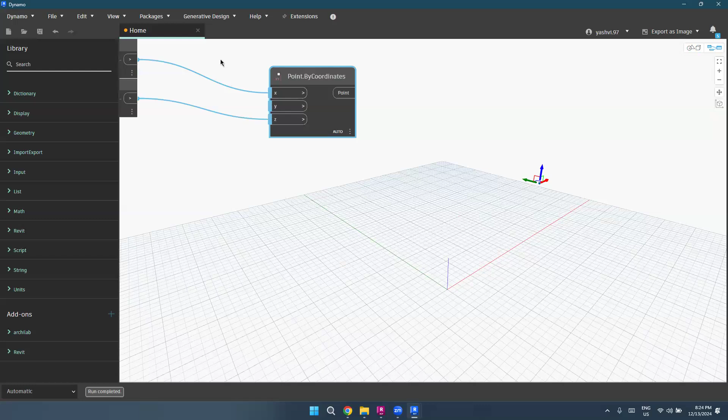Now, since I moved this particular point as per my requirement, I have automatically generated a couple of other nodes on this side, which define the position of that point. So if I go back to my graph view and I change this, you can see that the number changes over here as well.

If I move the green point along the green axis, I have another node that is generated for me - so I have X, Y, and Z. If I take this point and move it anywhere, these numbers automatically change.

Okay, if I try to bring it down to 0, which would be difficult because it doesn't snap, my numbers keep changing as per whatever my position is. Now if I take any of these and delete it, let's say I delete the Z1, that changes my point position again. It reverts back to 0, 0, 0 - brought back to the origin.

So that's the difference between your graph view and your 3D preview. Now let's understand what these nodes are, what they do, and how we work with them. We have different categories available according to the kind of node we want to work with, like some geometry nodes.

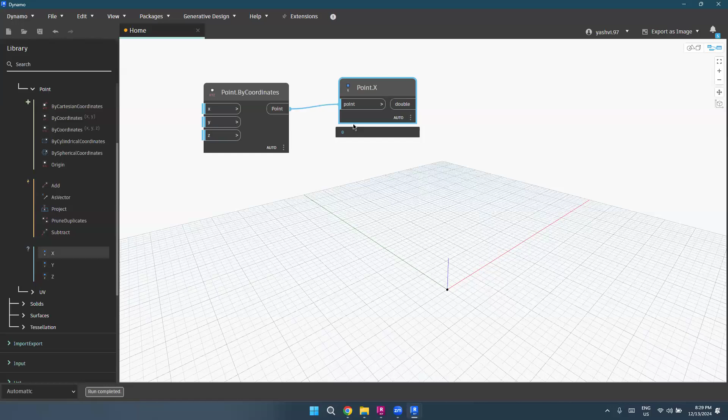So I wanted the x coordinate, so I used the x query. It's telling me that my x coordinate is 0. If I change it here, now it tells me that my x coordinate is 22.7. So it's just a way for you to generate data or get information from something that already exists. Right now I did it for a Dynamo element.

You can do it for Revit elements as well. If I just want to get the height of a level, or if I have a family and I want specific parameter information, I can do that using these queries. So those are the three different kinds of nodes that we have - the create nodes, the action nodes, and the question or query nodes.

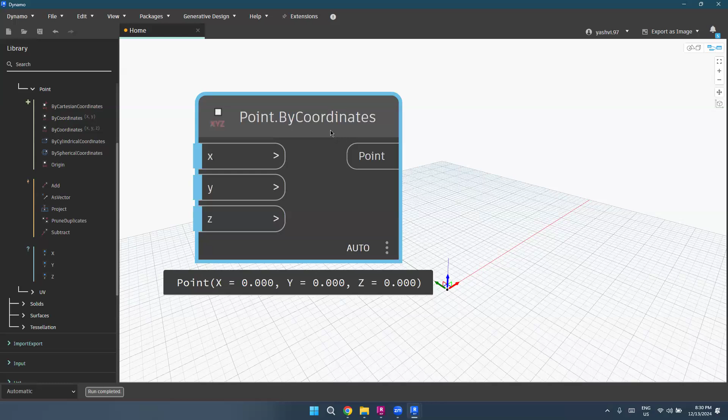Now for every node, the node has a particular anatomy of its own. At the top, you will have information or the action or output that the node gives you. Here it tells me that it is going to give me a point by coordinates. If I hover, it will tell me that it generates a point for me on the basis of the 3 Cartesian coordinates. We also have a point by coordinates in just the x and y axis. So at the top, you have what the node does and how it does it.

On the left, you have inputs. So I have my X, Y, and Z inputs because this particular node requires 3 inputs - it needs an X coordinate, a Y coordinate, and a Z coordinate. If you don't have anything attached on the left, it will revert to a default value. So for this particular node, the default value for X, Y, and Z is 0.

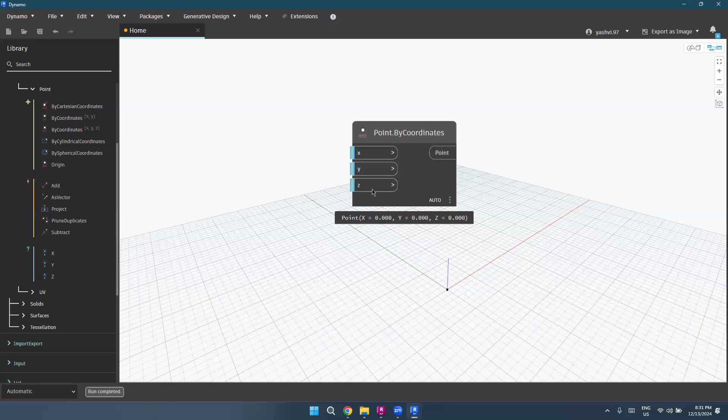Okay, on the right you have the output. What is this particular node going to give you if you have the proper inputs? So it tells me that it's going to give me a point. At the bottom, you're going to have data related to that node. Here it tells me my point is at X, Y, Z at 0, 0, 0.

So that's the basic anatomy of a node. At any point, if I'm adding a lot of nodes or I want to rename this to something custom that's performing a specific action for me, like this is my origin or starting point that I'm generating, I can just double click on the name and rename it. In that case, you get this blue icon on the side, which says you have renamed it from something else.

Are you guys following me so far? What are the different kinds of nodes? What does an individual node look like?

Okay, perfect. So one way to add your nodes is through your library. I can just go to the specific section, click on it, and it'll get added to my screen. Another way is you can search for a specific node here at the top.

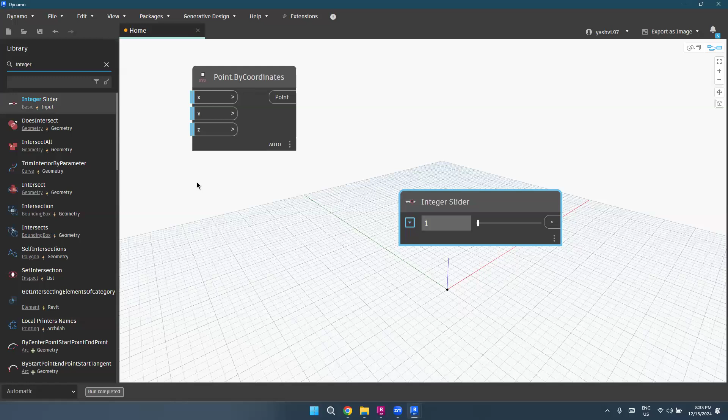The third way to add your nodes is you can right click on your screen. Usually the way I work, or people who've been working with Dynamo for a while work, is in order to make maximum use of their space, they usually have the library collapsed. I can just right click, search for the node I want, and have it here on my screen.

So let's say I want a number - I have a number slider as well that I can include. Now what is the difference between an integer slider and a number slider? An integer slider would always give you integers, which means it won't give you decimal points. It could be positive or negative, but no decimal points. Number sliders will give you decimal points.

I can change my integer slider to whatever I want - whatever is my minimum value, let's say -10, and my maximum value, +10. Now if I move my slider, the value ranges from -10 to 10. If I don't want a step of 1 - step is the interval between two consecutive numbers - I can change that step as well. Maybe I want it at 5, so now if I move my slider, it would only snap to -10, -5, 0, 5, and 10.

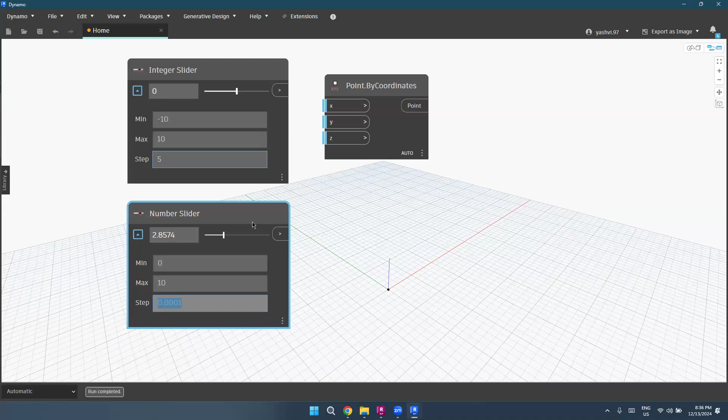So what I'm going to do is delete this number slider for now. So I have this integer slider which ranges from -10 to 10 at an increment of 1. Now here you will see I have this output - there's no input required for this integer slider. If I collapse this, you'll see there's no input area, only an output area.

So I can take this output and connect it with my X coordinate. Here you will see that on my x-axis, it has moved along the number that I've specified, which is -10. Okay, let me just zoom in slightly.

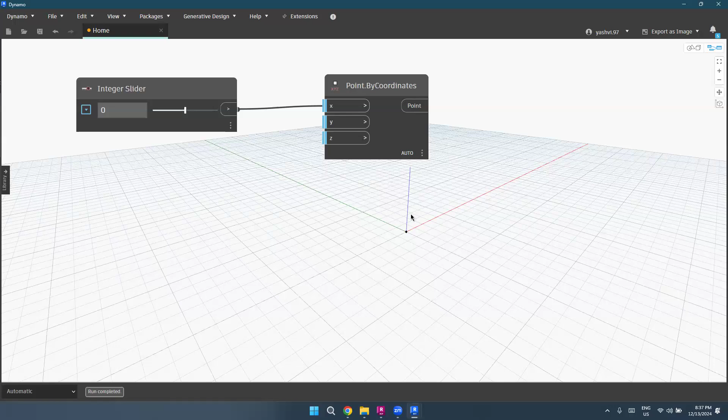Okay, so it is at -10 right now. If I change the number slider, like if I change the slider from here, you can see the point move on the screen. Now, the reason why this is happening or why it's working automatically is because we have set our script to automatic.

At the bottom of your interface, you're going to see automatic written, and next to it, you will see run completed. What this means is whatever changes you do in your script or on your interface right now, it will get executed immediately. Your output will keep on updating as you keep changing your input.

Usually we only keep automatic for smaller scripts, where we're not doing a ton of work, we're not working with a lot of geometry. Only in those cases do we work with automatic, because the issue with Dynamo is that if it crashes, it will crash Revit with it.

Dynamo will never crash by itself, but it will make your Revit not responding. So if you've not saved your work, Revit would also crash. So generally, a standard practice is before running Dynamo, always save your projects.

Once you are running Dynamo, instead of automatic, you can keep your runtime to manual. When you do that, it will never run your script by itself. So even if I change my slider, it's not changing the position of my point because I have not run the script yet. The moment I click on run, now my point would change. If I bring it back again, no changes happen until I click run.

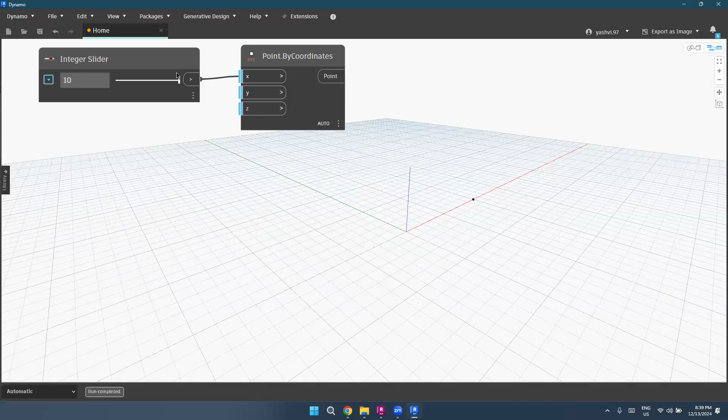For now, let me just keep it to automatic so there's no changes happening. So we have the integer slider, connected to X. Now, every output can be linked to multiple inputs. It's not necessary that the integer slider I have can only be connected to X. I can take the same and connect it to Y, and connect it to Z also.

But every input can only have one link. I can't have another integer slider and then connect it to X and have both of them linked. That is not how it works. X can only have one value. Either it is this node or it is this node. I can't control or change it to multiple nodes, but this particular node I can just connect it to different nodes.

So let's say I have this integer slider at 0. I'm going to generate another point, so let me just control C, control V, and this one is going to be at 10. So this is what it looks like right now: I have one point over here, another point over there. Now you will see that the output for both of them is point. So we have point 1, point 2.

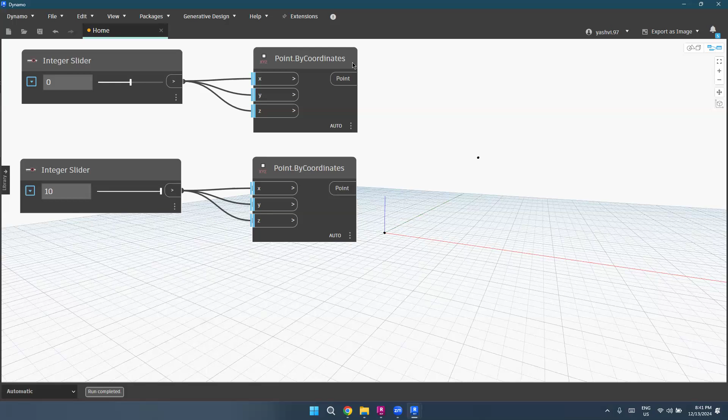Now, let's say I'm very new to Dynamo. I don't know what to do further. What can I do with 2 point inputs? So in case you have any confusion like that, where you're not sure what is the next step, if you double click on any of your outputs or inputs, it's going to give you different options, showing what are some of the outputs where I can use this particular point.

So one option is I can make a list. Other option is I can create a line if I have 2 inputs. You'll see a confidence rating on the left as well, which is how confident Dynamo is with this particular result.

Let's say I select this one, by start point, end point. So I have the first output, which is the start point. Then I can also connect the second one. When it's not connected, I don't have a line - it reads in red that I don't have an option or it's not connected. Once I connect this point, I now have a line.

Here you can see it says the line start point is XYZ0 and the end point is XYZ10. You also get the direction in vector format, and then at the last, you get the length.

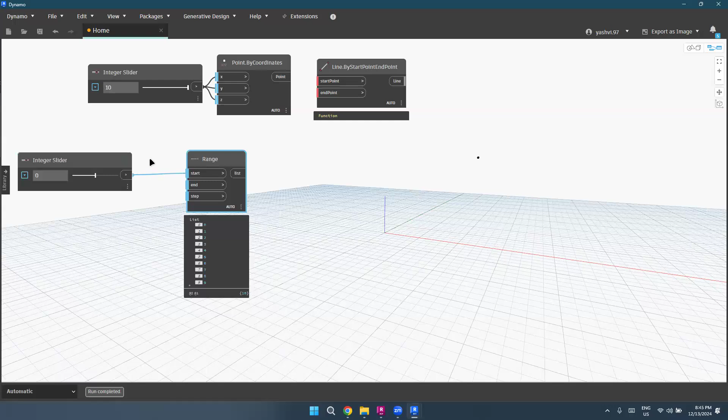So what I can do is let me just get rid of some of these. I can say that this is my start point, I'll make a copy of this. My endpoint can be 10, this can be -10, and my step I'll keep as 1 - the default value says 1, so let me just keep it at that.

Now once I have this list, I can again just say point by coordinates, and I can connect this list. So you will see here I have 21 outputs that I'm generating. I can take this list, connect it to X, so you will now see multiple points all on the x-axis at different intervals - I have 21 points all on the x-axis at different intervals.

And again, I can connect it to my line. So here now you can see all these individual points are connected to that one endpoint by lines.

Similarly, if let's say I change this to X, Y, and Z - Z will not work because it's just giving me one line. So I have something like this. I can do the same thing for this one also - I can take my list and connect it to Z.

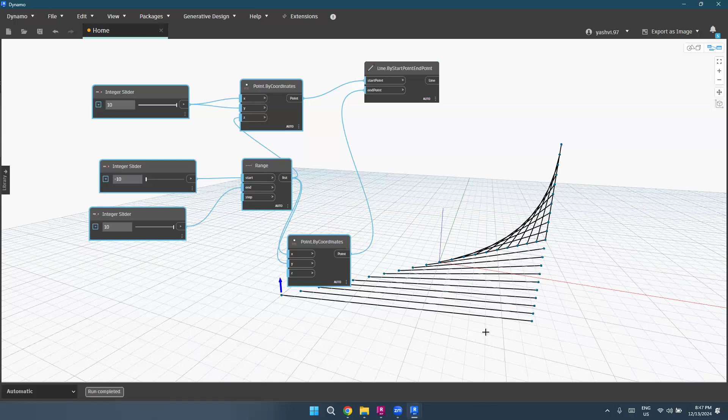So now I get something like this, where this point also has multiple outputs, and this point also has multiple outputs, and all of them are now connected to each other. If I just see this, you will see 21 lines that are generated, and you can see how they are connected - which point is connected to which other point, what is the position, what is the length, you can see all of that. Are you guys following me so far?

Now, other than this, I don't want to do all this complicated stuff, like just to generate one mesh I had to have so many nodes. I don't want to do that.

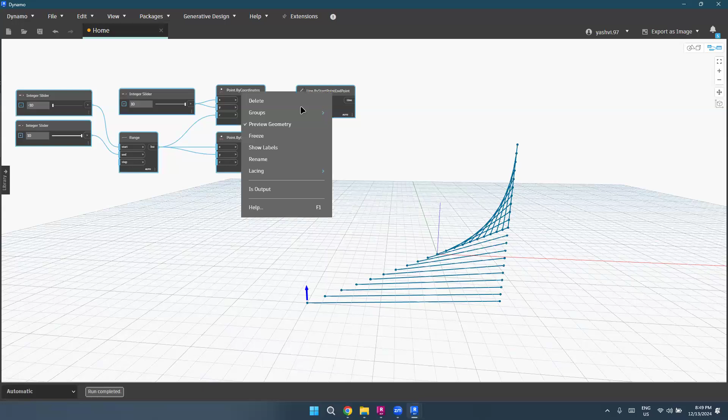When you're working with larger scripts, there's limited screen that you have, so it can be difficult to make sure everything is readable and understandable. So we can always group our nodes. I can right click and say create a group. This creates a color coded group wherein I can collapse it, and it would now show me only the input required and the output at the end of the script.

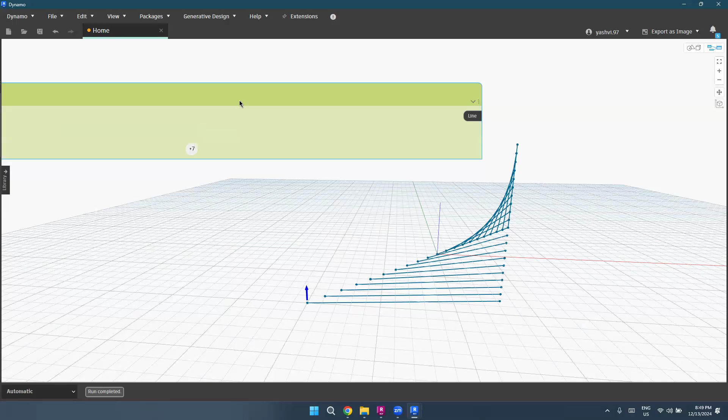So my input right now, where I've not already added something, is my step value and my Z value, and my line is the output that I get. I can change this, say this is to generate a mesh, and uncollapse it as per my convenience. This makes sure you can utilize whatever limited space you have, and the closer you place your nodes, the shorter this group is going to be.

Now what you can also do for individual nodes as well as groups is preview and unpreview geometry. What preview geometry does is, if I uncheck this, it will just hide whatever this node was.

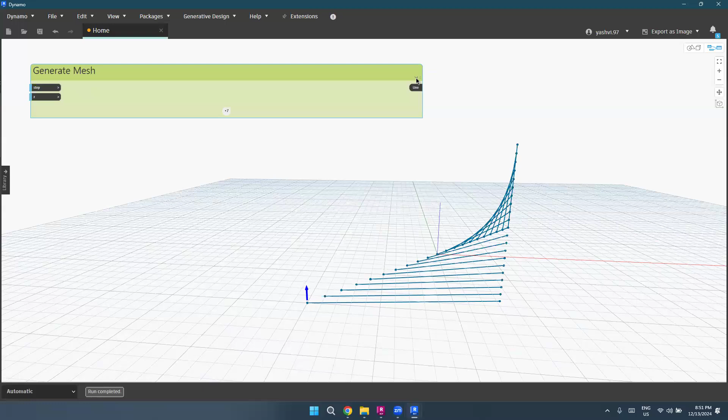What you can do is, if you uncheck preview geometry, you won't be able to see what that particular node does, it just hides the output for you. So even if I take this and I uncheck preview geometry just for lines, now it's only going to show me the points, it's not joining them by lines anymore. It would also show a gray bar at the bottom, meaning this node is right now hidden. At any point I can say preview geometry again, and now my nodes are joined back. So that's what groups do.

Now let's just hide this. Rather than doing this entire thing, we have a specific node in Dynamo known as a code block. In order to generate a code block you can either search for it, or if you double click on your screen, a code block is added. This code block also works in design script language.

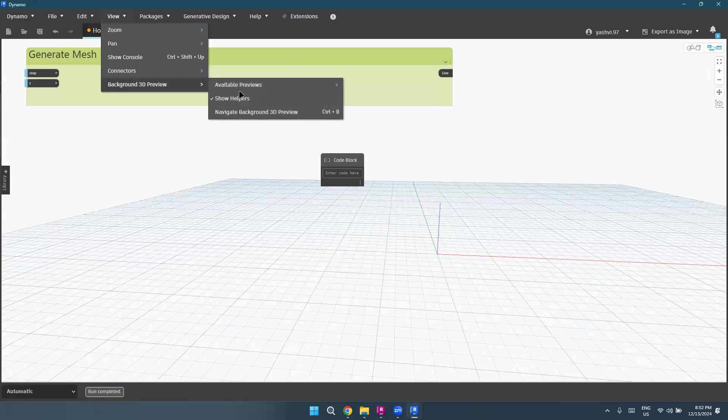So I can just say, let me just add a label to this. You can't find the label thing, but what you can do is, whatever nodes that you used, you can write them in the design script language, and it would give you the same output. So let's say I want a point.

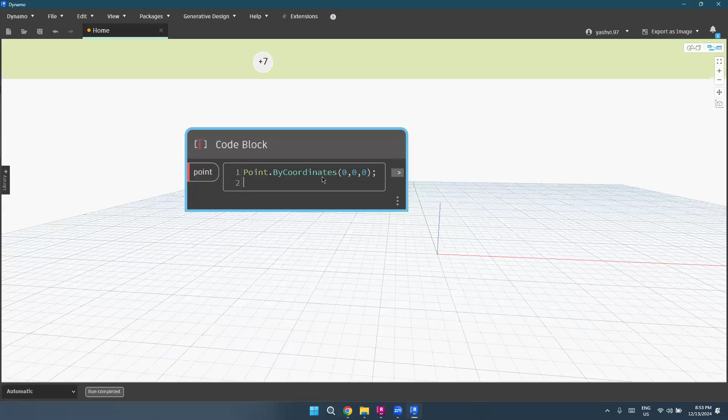Let me just zoom in so you can read it. So I want a point by coordinates, and here I can give it a value, let's say 0, comma 0, comma 0. This is my first line of code, so now I have a point which is at 0, comma 0, comma 0.

Again, I can add another point by coordinates, this can be at 10, comma 10, comma 10. Semicolon, enter. So now 2 points, one is at 0, one is at 10. Now how do I connect a line through these? Because if I want to create a line by start point and end point, I have to define what my start point and what my end point is. So how do I do that?

So for that, first I will have to give an identity to my first point. So I will say A equals point by coordinates, this would be B equals point by coordinate. And now my line by start point, end point would be A, comma, B. Semicolon, enter. So now it has joined both these with the same line.

Apart from this, what we can also do is, if I don't want to add values over here, I want to work with the range part of things. So instead of 0, I can make this a variable, that this is X.

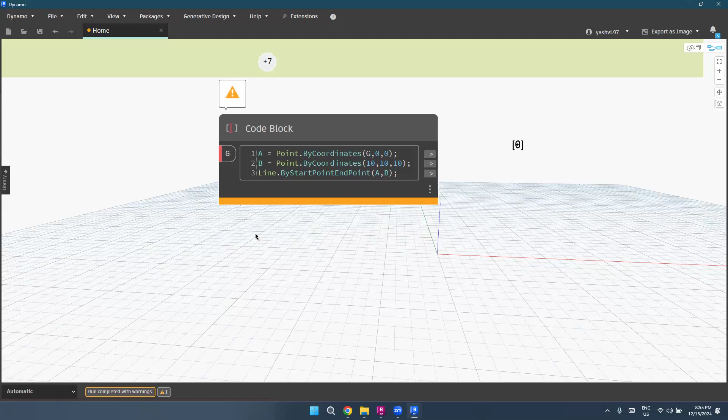Okay, so now I get an input here because I've added a variable. Whatever, however I change this variable, let's say I name it G, so now my input also becomes G. It's not necessary that this should always be X.

So I can now just add a range node. Here you can see you have 0, 1, 2, 3, 4, 5, 6, 7, 8, 9. If let's say I take point B and change the variable here as well to G, you can see how those other points are also created.

If instead of G, I name it H or some other variable, now I have another input that is added for me. So here also I can add a range node.

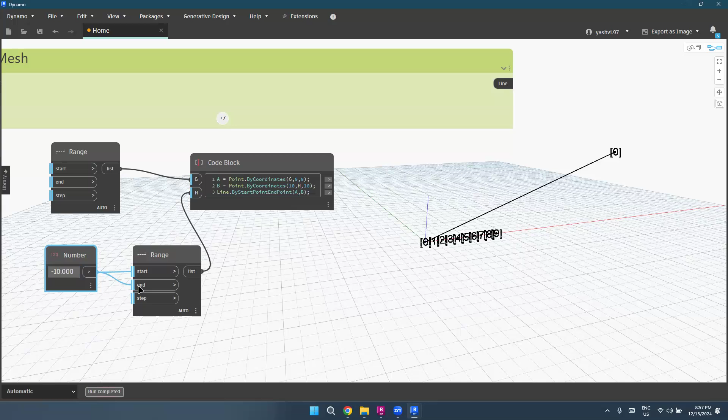Let me just search for number. And the number could be maybe -10. So accordingly, this would update for me.

So rather than having to go through this entire process, I can just write it in a code block. So here also I have that option. I can add the range part here itself, with the help of list, I think.

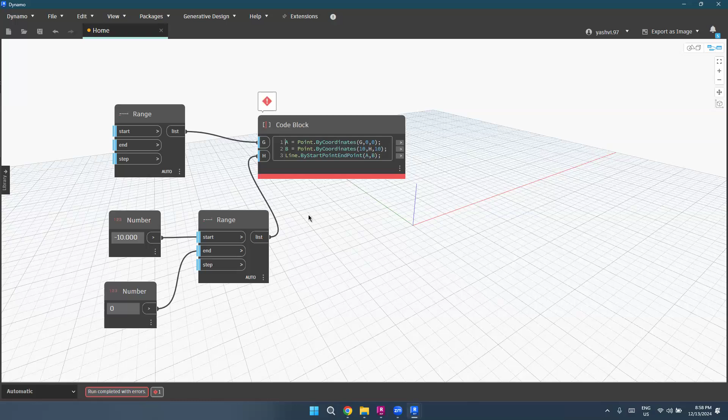Well, yes, there's some other way, but we can add the range node in the code block also. It's just a more condensed way of you being able to work with things. Because whatever I have in this part, all of that can be condensed into this one code block that I have. So it's just a way for you to keep your scripts a lot cleaner. Whenever you have easier nodes, easier things to do, you can use the code block for it.

The benefit of working with code block is that it will give you ideas. Like let's say if I want to generate a mesh, I can just type in mesh, full stop. Then what is my method of creating it? If I want to create it using points, I can mention that, and then it would also tell me what input is required. So I need point and I need indices. It'll just give me a complete breakdown of what that particular node is supposed to do.

All right, following me so far? What is the script? How does code block work?

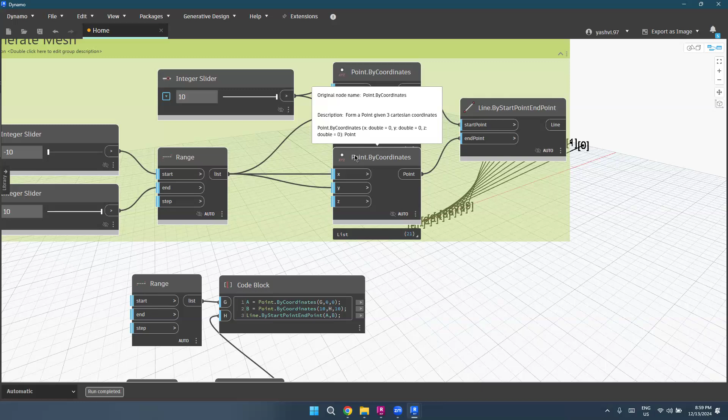These lines in the middle, these are known as the connectors. They connect your input to your output and vice versa. Okay, clear so far, everybody? Any questions so far?

Now, whatever we created so far was in Dynamo. It does not affect our Revit geometry whatsoever. How do I bring Revit into Dynamo, and how do I take Dynamo outside of like into Revit?

So for that, we need to work with these Revit elements, these Revit nodes. You will have Revit elements, you have filters, you have geometry, a lot of different things. You will have a bunch of different elements that you can bring in, a bunch of different nodes that you can bring in. So let's say I have walls.

Okay, so let me just close this for a second. Let's say I have walls here in Revit. Okay, basic wall.

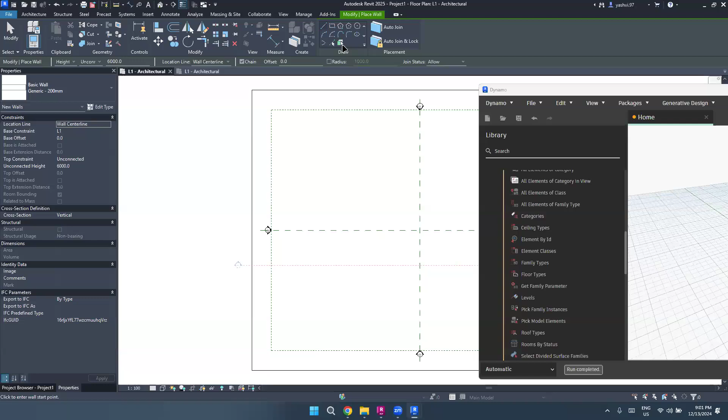Now, if I want to bring this into Dynamo, I have a bunch of different options. Either I can bring all elements that are at a specific level, I can bring in levels themselves, I can select a level from the document, I can bring in faces, so you have select face or select faces. Then you also have family instances, you have select model element, a bunch of different options.

So for now, let me select model elements. So the moment I click on that, it's going to tell me to select something in the model. All right, so I'm going to click here on select. Now you will see that Revit gets activated.

Okay, sorry, I have to use the other mode, which is select multiple. So I'll click on select. It's not open. Select multiple is not working. Let me just go with all elements.

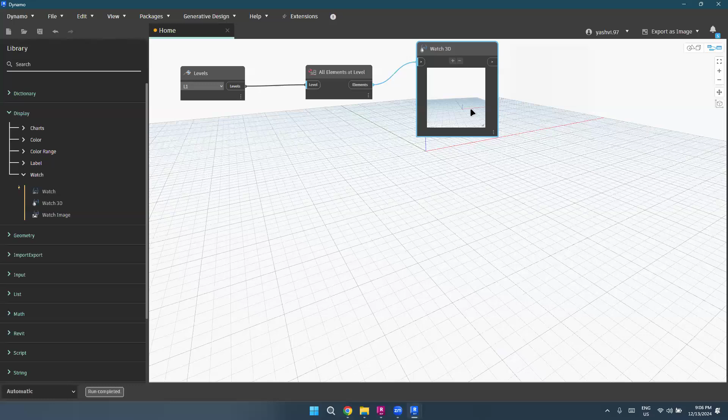Give me one second to figure this out. There's a node that I'm missing.

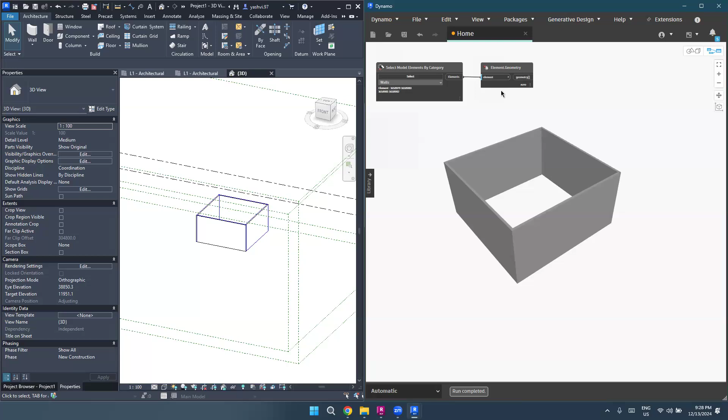Now whatever we have in Dynamo, this geometry, I can turn that into Dynamo elements also. The only difference is I will have to use geometry nodes to get individual lines, individual points, and those kinds of things. So I can generate lines.

So you can see we have a bunch of surfaces that are created. I can take any of these surfaces—if you click on any of them, you can see the location of that surface. I can take any of those surfaces or explode it further. If I just take this, Control C, Control V, now all of that is broken down further.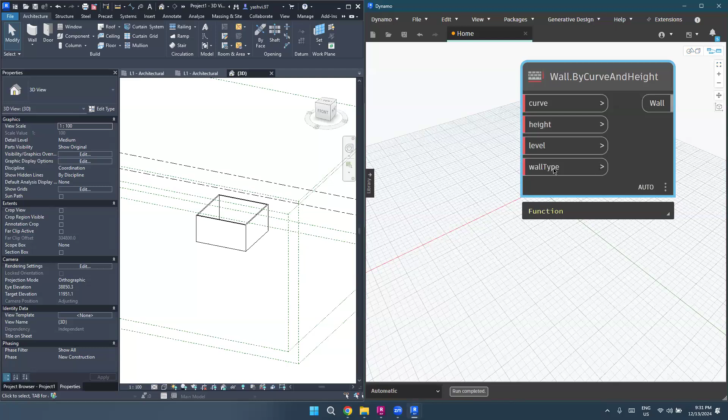First, in order to generate the curve, we can use our initial method, so I'll search for point by coordinates. Instead of a straight line, let's say we want a curve which has the best fit—best fit through points.

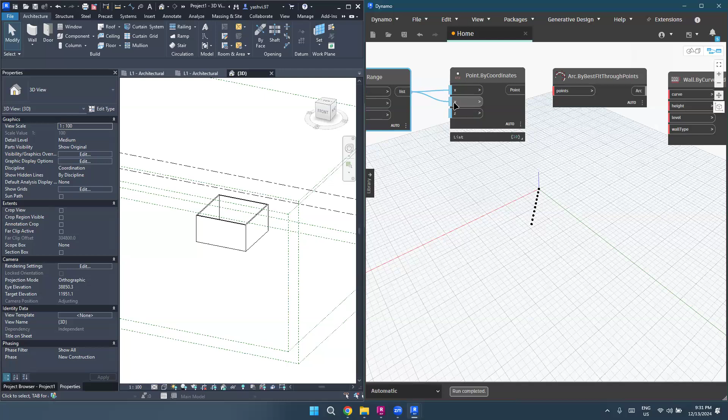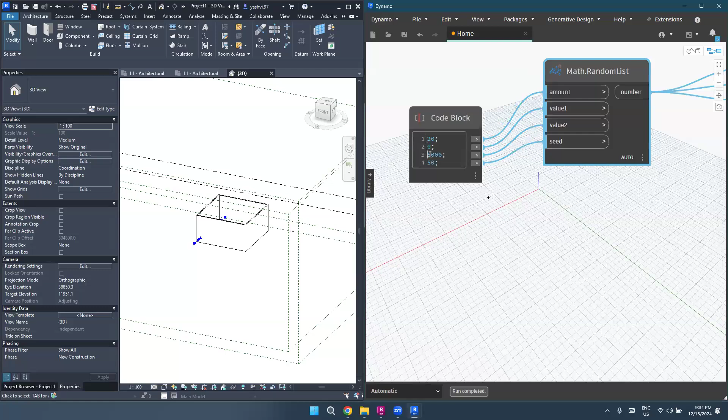And here on the left, I'll add a range, random. So here you can see in Revit also we have some random points that are now generated for us. I can turn this into something like this—let me just adjust it. So these are some points that we are getting.

Now I can take this point by coordinates and use it to generate an arc. So here you can see we have an arc, some sort of line that is created—so we have the path for our wall.

Now using this, first we can connect the arc to the curve—this can be a straight line or a proper curve, anything. Then you need to define the height, so let's say I want the height to be exactly 4,000. I'll add the height. Then what is the level?

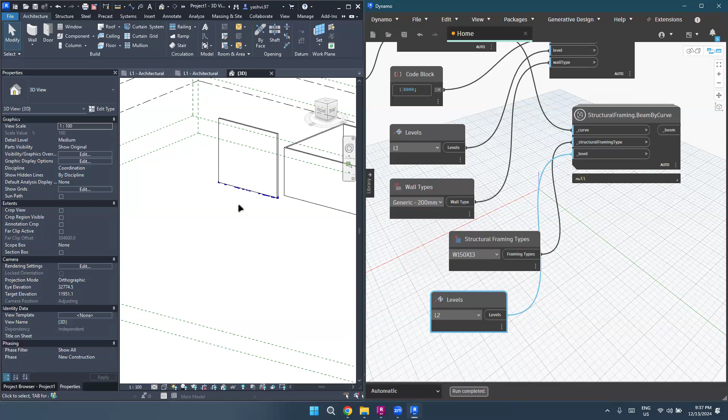And then what is the level at which you want to create it? Maybe I want a beam at L2. So in this case, then we have this wall.

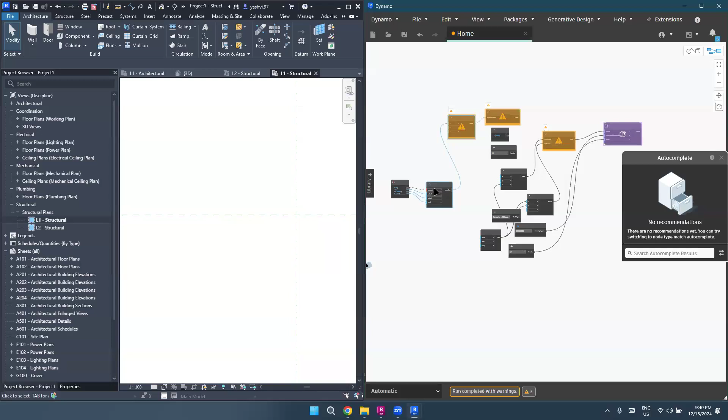Made my Dynamo file very chaotic. Just give me a second.

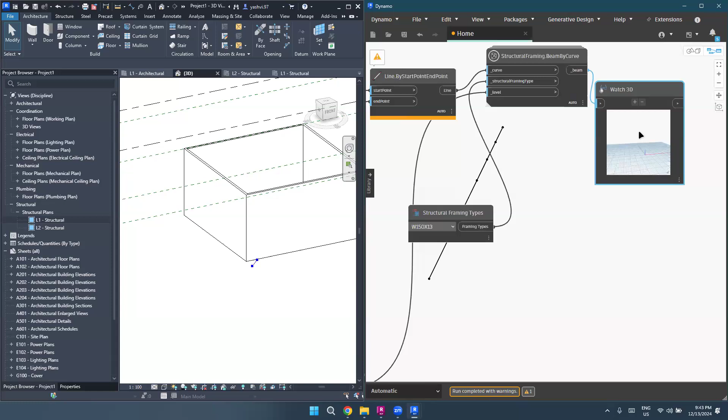So ideally, after you've done all of this, your beam should be created, generating for us. It's crashing.

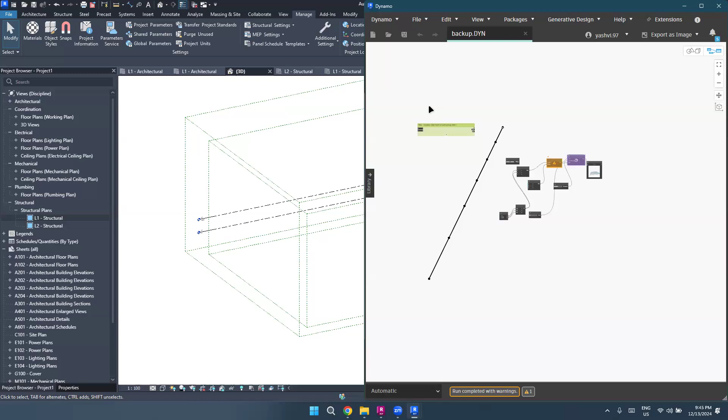So usually the way this works is, once you add the beam node, your beam is generated for you along the curve that you have selected. And as you change the position, the beam also moves. It's just a way for you to ensure that whatever you are creating, whether it's multiple trusses or multiple geometries, you can do that very easily with the help of Dynamo. That's pretty much what I was trying to explain. For some reason it's not working in my favor today, but that's pretty much what you can do.

Now, beyond what you can do with Dynamo over here, you also have Dynamo Player. With every version of Revit, you also have certain scripts that come pre-installed. These are not the sample scripts, these are specifically Dynamo Player scripts. So you have these Autodesk sample scripts, a bunch of content already available for you. This changes from version to version, so for 2025, these are the scripts currently available.

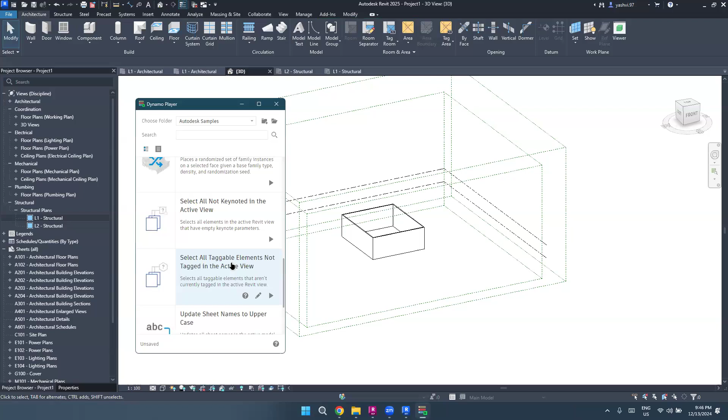So how it works is, let's say I have some walls again. We have this option, this particular script that says 'select all taggable elements not tagged in the active view' - all taggable elements not available in the current view.

I'll just come here to Dynamo Player, select 'all taggable elements', and click on play. It usually is not this slow, I'm not sure why it's not working today.

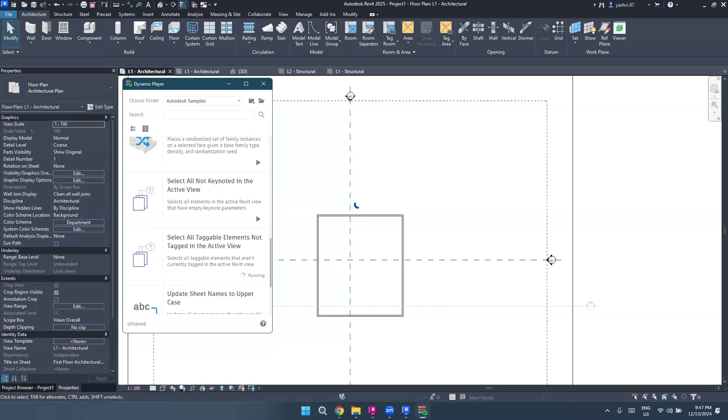What it would do is select these four walls for me because they are the ones not tagged. You have a bunch of different scripts you can run - we can also check these scripts. Here, for example, it has selected 8 things for me: some annotations, reference planes, walls, and the plan itself, because those are just things that are not tagged.

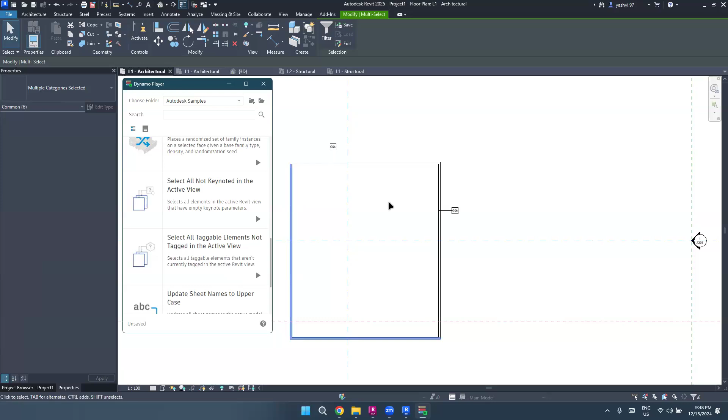If I were to tag something, like add a mark for my walls, and run the script again - now you will see these two are not selected anymore because they are tagged. It's only selecting these two walls for me.

Similarly, we have a bunch of different scripts we can work with. For example, we have this 'update sheet names to uppercase'. So whatever sheets I have over here, I can just say play - give it a minute - and you'll see all your sheet names are now in uppercase.

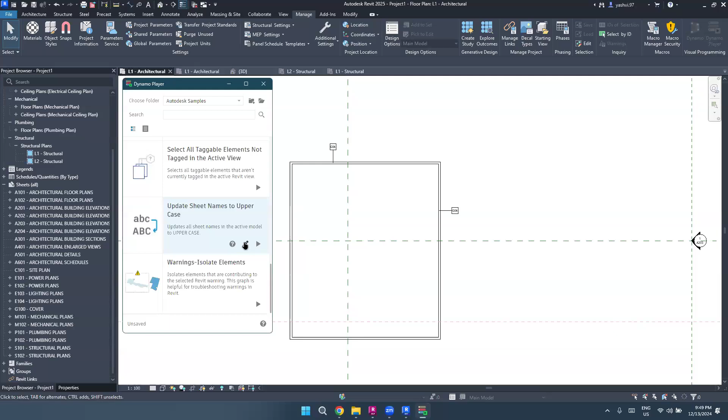What we can also do is click here on edit, edit in Dynamo. So ideally this should open up Dynamo for me, and now here you can see how the script was created.

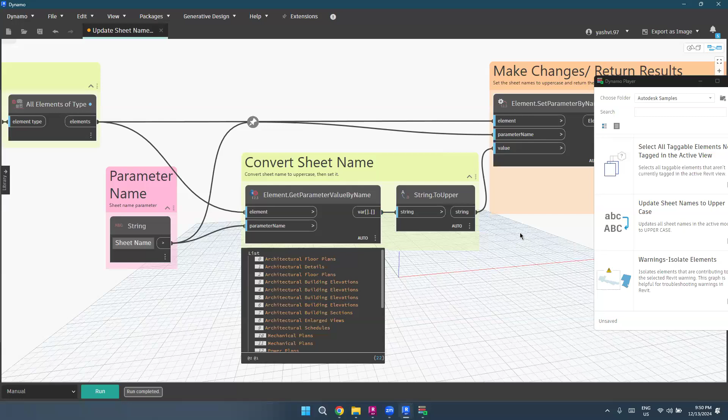First it's selecting sheets, then what is the parameter we are considering. In order to change the sheet name, we have to get the value of the particular parameter, so we need to add the element, we need to add the name of the parameter. This gives us all of the names, and then here we have this node which is string to uppercase. Similarly, you also have string to lowercase, string to title case as well. You can change the string as the value, element and parameter would remain the same, and then you have all of the sheet names converted.

Now I can change this to anything else I want. So here, for example, we want the parameter name. Let me just take this and open up a sheet. For this sheet, what are the different parameters we have? We have approved by, designed by, checked by, sheet number, all of those things. So I can take approved by as well.

So instead of sheet name, over here I'll just type in approved by. My parameter name has changed. I'll click on run again - now you will see 'approved by' is now in all caps. Similarly, we also have string.

String to uppercase, string to lowercase, we have string to title case. Instead of string to upper, I can take string to title case. Let's run it again. Now let's try string to lowercase.

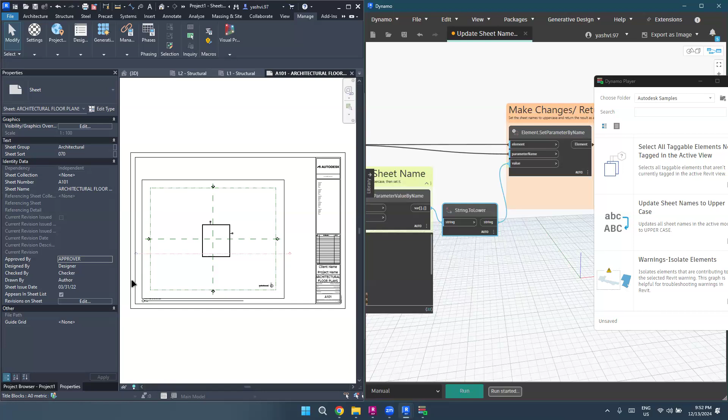Okay, so now everything is in small letters. If I go back and change this from approved by again to sheet name, and run it, all my sheet names are now in lowercase.

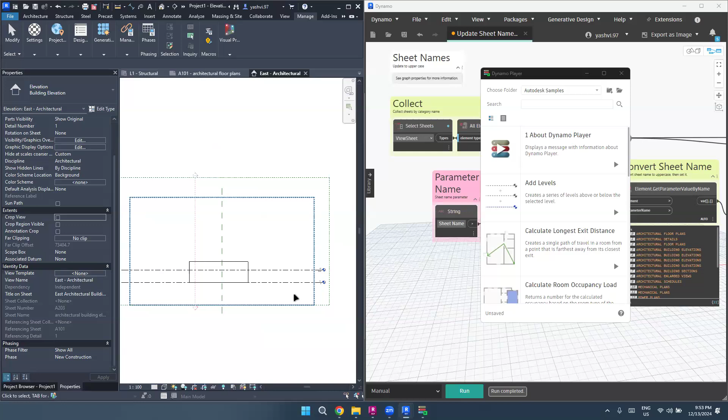Similarly, you have a bunch of other ones as well, like add levels. If I go to any elevation view, let me just enable the annotations. Okay, so we have L2. I can use this add levels, click on play.

Now, since for this script I need some inputs, I can first select the distance. I can define the number of levels and what is the level above which I need to add the new levels. My distance could be in whatever units that I want.

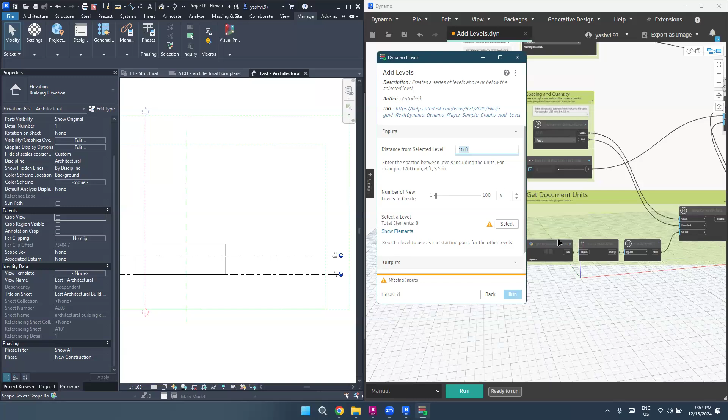It's not necessary that it's always in project units, because here we have this option of get document units. So it's taking the project units and converting it to another unit, to calculate the distance, and then it is creating the levels.

So whatever I mention over here could be, let's say, 15 feet, while my document is in millimeters. I can define the number of levels—let's say I want 12 levels. We'll click here on select, I'll select the level, and then we can click on run.

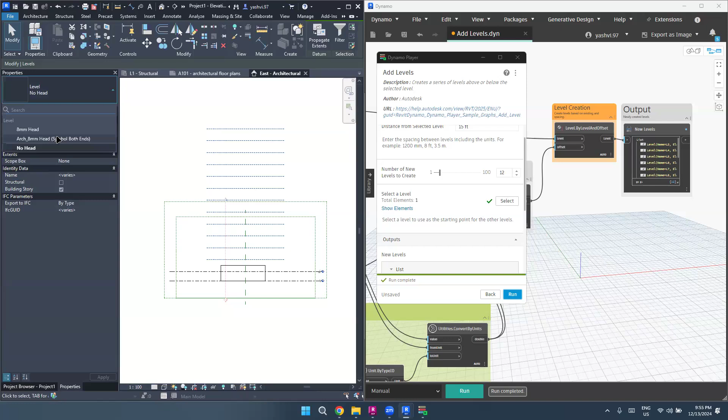Okay, so here you can now see in the middle that we have all of these different levels that are created for us. We selected 12, so now we have 12 levels created. And we did not have to do this using array or create similar or anything like that—we just have these bunch of levels that are now generated.

So for any script that's available in the player, you can click on edit and you'll be able to see the output or see how the script was created in Dynamo. You can check how it was drafted, and what is the purpose of these individual nodes.

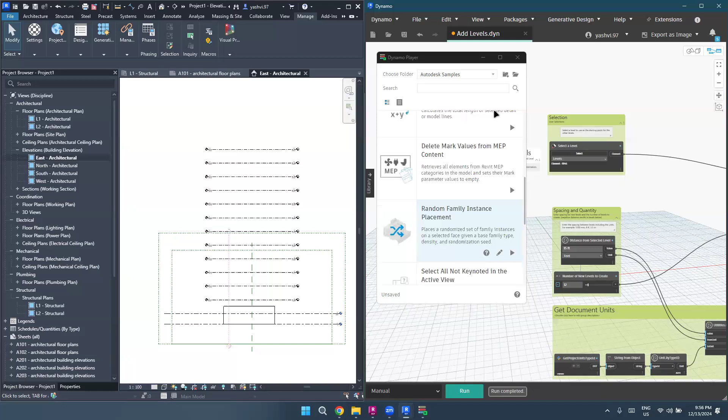Because whatever scripts you see over here, they are all for Revit, right? They don't have any Dynamo requirement in them—they're all for Revit. So you can go through these, go through the Dynamo player scripts. The reason I'm asking you to do this is because there are thousands of different nodes available in Dynamo, and it's practically not possible for you to go through all of them and understand what all of them do.

Not all of them would serve the purpose that you want them to. Seeing existing scripts is the easiest way for you to understand what every node does, because you can visualize the output at the end.

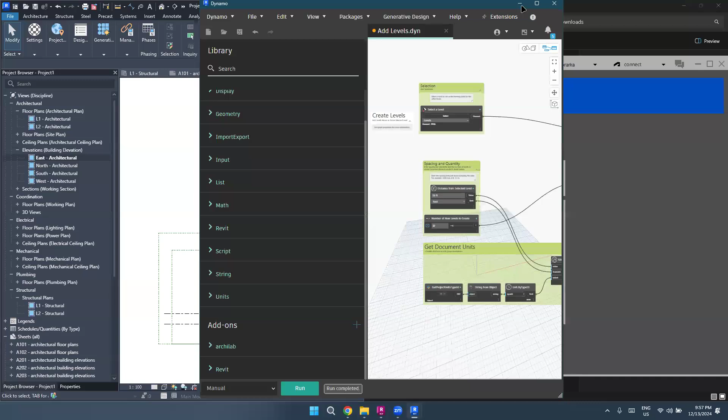So your task for today is going to be the same thing. Apart from the reading material that we share with you, you have to go through the Dynamo player scripts, and you have to recreate one of those scripts. Now, how do you recreate them? That is on you. You can try to make them shorter.

You can try something completely different, take an existing script and try to make it do something else—like how for the sheet ones we used approved by instead of the sheet name parameter. So you can experiment with them, try out and replicate one of the Dynamo player scripts. That's your first task.

The second task would be to go through the reading material that we're sharing with you, because you would need that in order to understand what we're doing in the next session, since in the next session we get full-fledged into automation—we understand how we can use Dynamo in order to automate our repetitive tasks. All right, so are you guys clear? Do you have any confusion?

I have a question. Earlier, you were trying to make that curved wall. What is the use case for it?

Suppose I'm doing some facade. Does it help to work that way? I couldn't get the connection between the use case and what we were doing. Let me just show you an example. For some reason my Dynamo is not working properly, but I'll show you one.

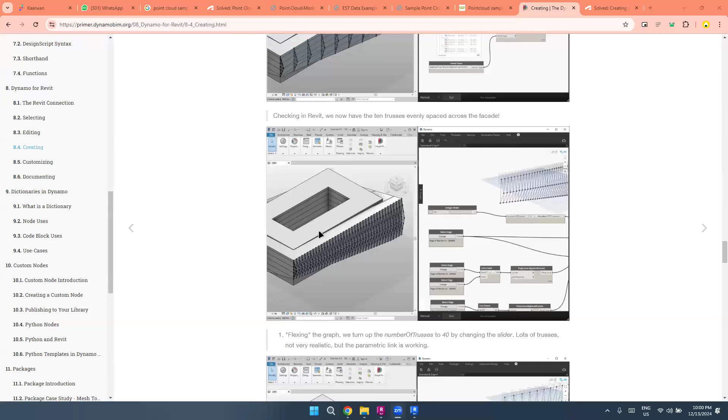So that's one example of it. Just one second, let me show you the final output. Here, so depending on the number of trusses that they want, you can space them out accordingly.

So you can use this for your jali walls. Let's say you have a curtain wall which has multiple grid sizes, and you want to fit a specific family in it - you can use a Dynamo script for that. You have to make sure all of them are evenly spaced, or at specific intervals, so you can use a Dynamo script for that.

You can use it whenever you have an updating component, something that needs to change with how your model element changes. So we had created this Albahar towers two weeks back. Can something like that be helpful using Dynamo? Yeah, so I'll show you an Albahar script that I had made.

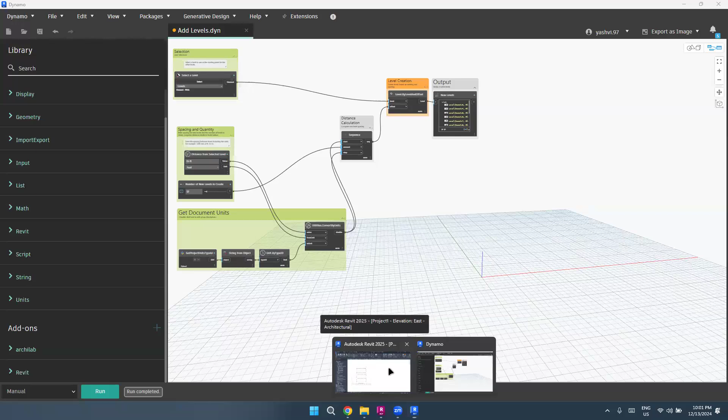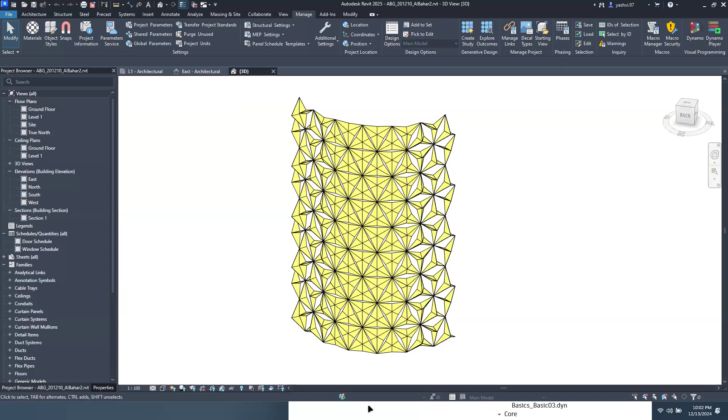So the script that I made for Albahar was basically, let me just open that. Let's show you. So let me just break the script down for you.

So in order to create the Albahar tower, you generated an adaptive family, right - that adaptive panel that changes its angle. Now, when I want to place that panel on my facade, I have to place it manually and then use the repeat function. And then if I hide my mass, the panels also disappear.

Here I don't have my mass enabled. Whatever geometry I have, this is actual geometry that is currently visible, this is not mass geometry. The reason why that happens is this - I created a script wherein I can get points for placement.

So I can get the points for my placement. Every one of these triangles you can see we have point 1, point 2, and point 3. So those points we can import in Dynamo, we can generate those points in Dynamo.

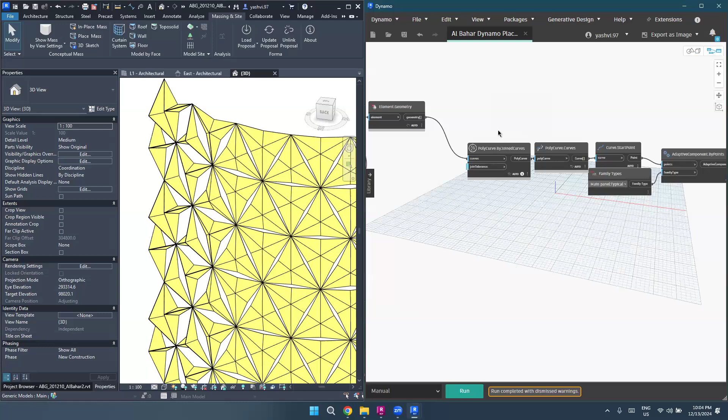And then on that I'll be able to generate a curve, and on that we can place our adaptive panel. So we have the main panel that we created. I have the curve for all of these individual points, and I can place that panel on those points. Okay, so let me show you the mass.

This is what the mass looks like. Now, in that mass, we have these points. These points will read in Dynamo, and then Dynamo will place my adaptive component on that particular element.

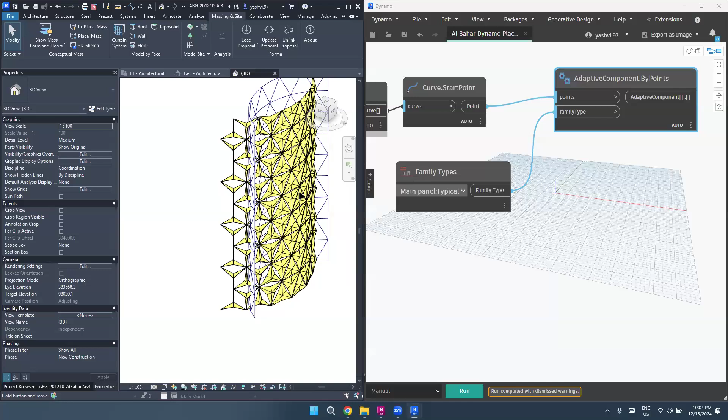If I don't get time to do it, but if I expand the script further, then we can also control the angle of opening. So here, for example, you can see 1, 2, and 3, which are the 3 points it is considering. Right now, if I have to change the angle, I'll have to go into my properties and change it manually.

Using Ladybug, we can check the location of the sun and implement that over here - that if my sun angle is at maybe 60 degrees to this particular panel, then it should open at an opening factor of 0.5 or 0.6 or whatever. So I can control that and make this into an actually responsive facade as opposed to changing all of my panels manually.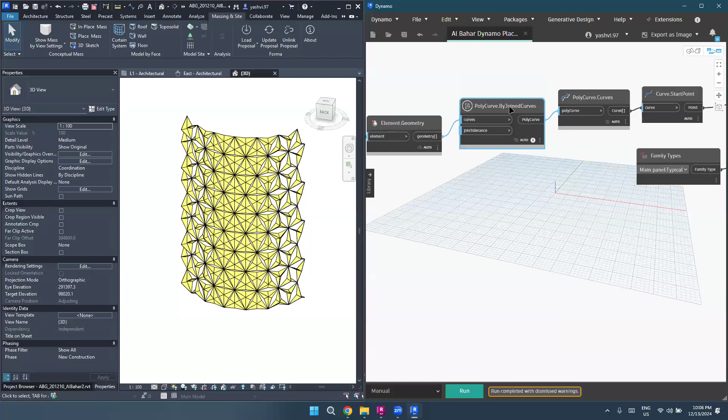So right now this one is just for placement. Let me just show the geometry to you. This cannot be the right document. This was the panel that I was working with.

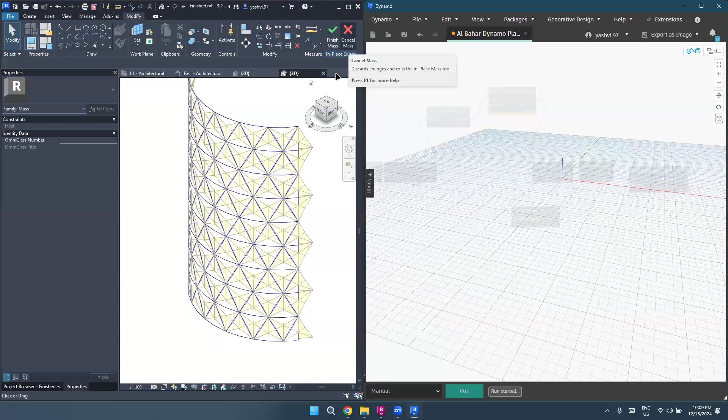So basically, here you can see your panel, the mesh that you created. You can see that here in Dynamo also, and then Dynamo uses these points, these lines, in order to place the adaptive panels. I placed it on top of the existing mass, which is why it took a little bit of time, but we get the geometry here in Dynamo, and then Dynamo uses this geometry to place your model elements.

It will read those points as 1, 2, 3, how it was made in the adaptive family when we were creating it. The way you guys created the adaptive family is a slightly more complicated method, but what I did to make it easier for me in Dynamo is that instead of just working with one family, the adaptive family, I also had a family for just the points, which is the placement plane. Let me show that to you, let's modify it real quickly.

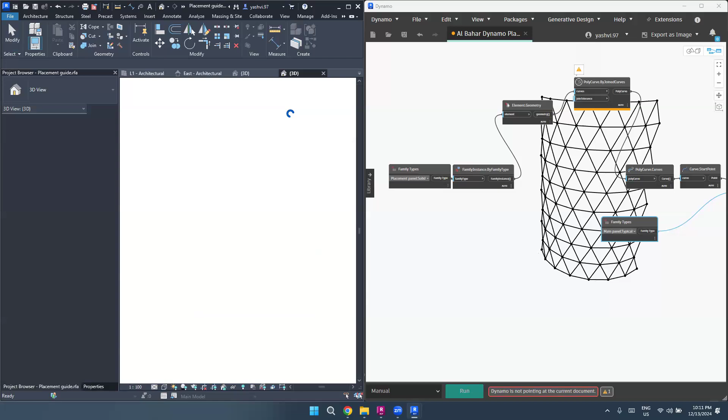So it's just this mesh, and none of this is visible in the view. If I select this panel, its visibility is controlled so that I don't see the panel. This is what Dynamo is considering in order to generate this geometry, these curves, these points for me. Technically, this is also an adaptive panel because I need the 1, 2, 3, 4 points for it. Whatever mesh is generated, the base that you created picks the points, and on these points, your adaptive family will pick these points to be.

So I place this as 1, this is 2, this is 3. So now my adaptive family would always consider this is 1, this is 2, and this is 3, as opposed to something else or something random. So that would give me precise placement.

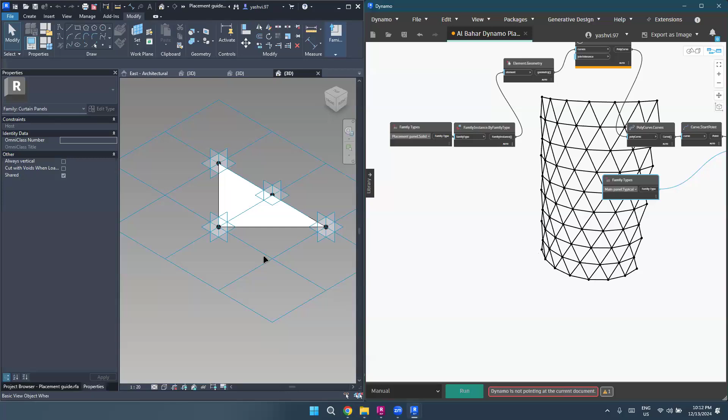But then when you created this base, how does this get placed on this curved wall? How do these points read on your curved wall?

Instead of placing my adaptive panel as part of my mass, I think the way you guys created it, you pick the adaptive family directly from here. You also place the base point thing on the mass in Revit. I was wondering if you've done it through this whole script thing, so that's how I got a little confused. How do you place that base, so that you have created how we did the adaptive family thing? Okay, got it, got it.

So the purpose is that using this base, I can generate the points. Because otherwise, if I don't do this, or if I follow the generic method, then if I go to my mass and hide my mass, my panels would also disappear. I do not want my panels to disappear, so instead of treating these as generic mass elements, we are now treating them as model elements. Here it reads as a generic model instead of mass, so even if I hide or show my mass, this would always be visible.

Yeah, okay, got it, got it, makes sense. Thanks. No problem. If you want, I can share a screen recording of how this was created. Yeah, I'd like to see that. Thank you, no problem.